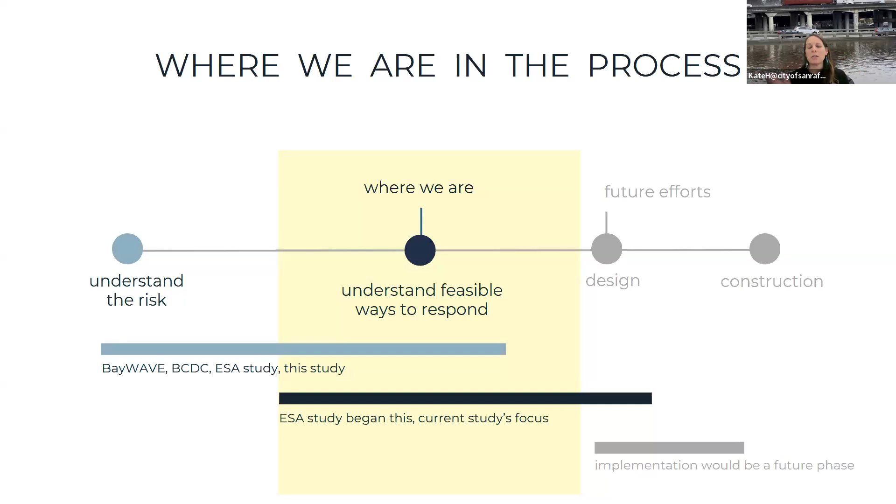Just to say quickly, design and construction will come in the years ahead, but they're not what we're talking about right now. In this study, while we may be talking about different adaptation measures, we're not intending right now to construct them. We're looking at several options and understanding them.

Because we have a very dense, very vibrant community, and a very close relationship with the water, in this case there isn't a right answer. We have hired experts, and they'll share their information and opinions, and that's really valuable. But as will become clear, having that information doesn't necessarily point us to a single right answer. In this case, we don't really have a single answer. It's going to take many different types of actions over many years and by many different people.

At this point, we have to consider the whole community. We have more than 10,000 people that live on land lower than the bay. Lots of jobs, infrastructure, healthcare, schools, really precious places to us, as well as the highway and wastewater treatment plants. So even if you don't live in this area directly, we're all affected by these impacts. We're using this information to help us make a more informed choice about a path forward that can help create a more thriving community in the generations to come.

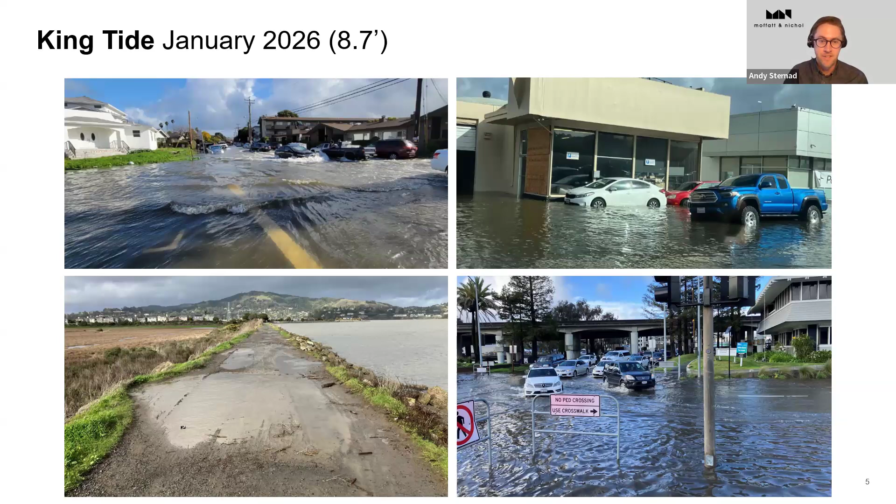These are tipping points. We're already seeing these overtopping impacts, but they're at the threshold of much larger impacts, overtopping and potentially compromising larger segments of the shoreline. So it's a very important moment. These risks are present today, and even higher tides could be seen in any given year. There's a statistical probability of much larger events in any given year, but there's definitely a trend.

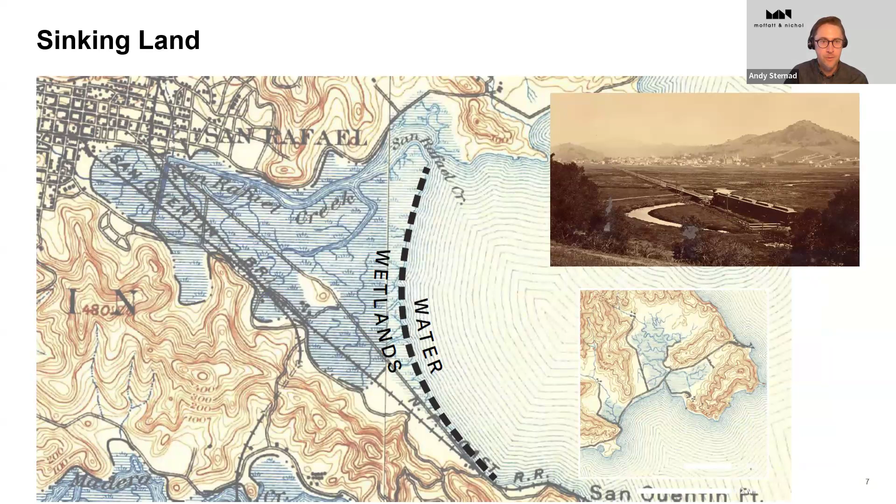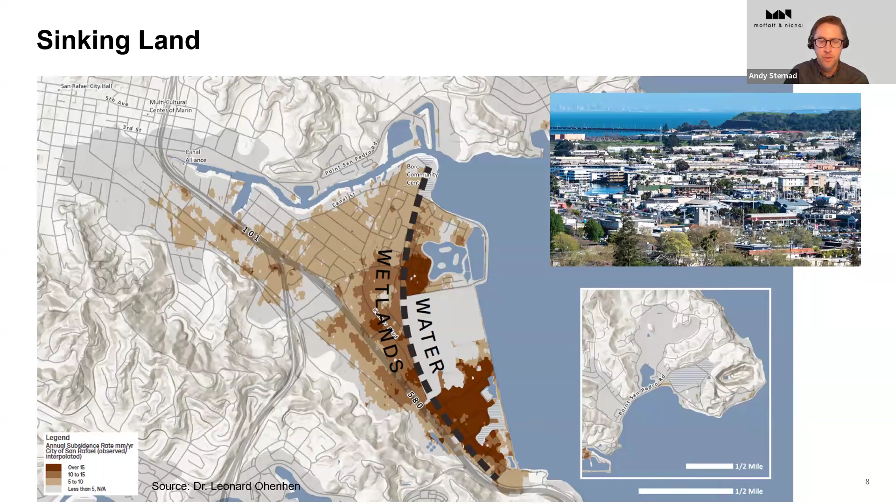The shoreline itself is also low and unstable. It's not continuous around that low basin, and in many cases it's very informal or unstable, literally sometimes piled debris. The king tides we've seen recently, in many cases along the canal shoreline and the bayfront, are within inches of overtopping some of those areas. And in some cases on the bayfront and canal have already overtopped in the recent king tides.

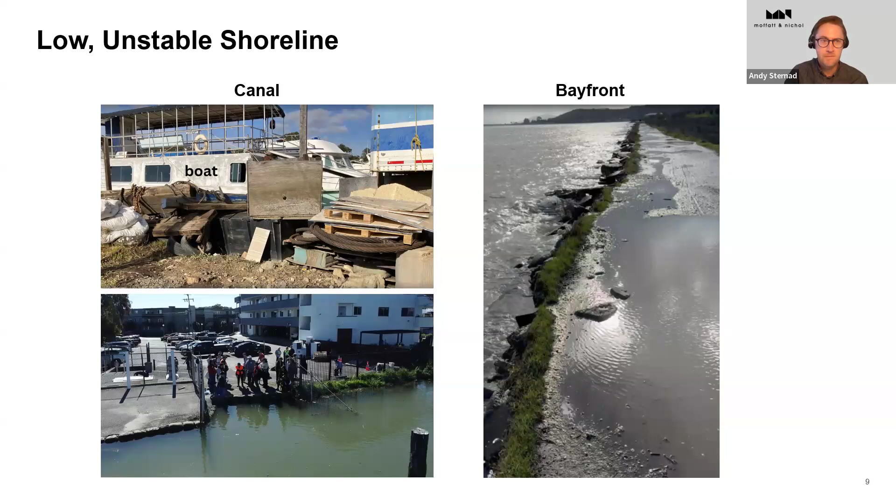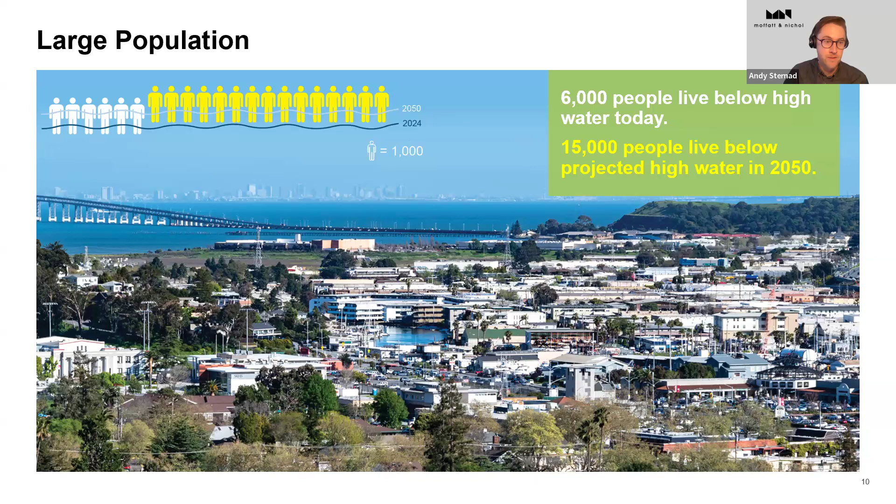The shoreline today has very limited space in general and many private owners. This is really not an advisable condition. Where coastal flood risk exists, we typically like to see public ownership and public accountability for that continuous edge, rather than relying on individual owners to maintain it. So there are many private properties on both sides of the canal that put everyone living behind them potentially at risk if their shoreline is not maintained and elevated over time. This is a fundamental challenge - space to adapt is hard to come by, especially within the canal shoreline area.

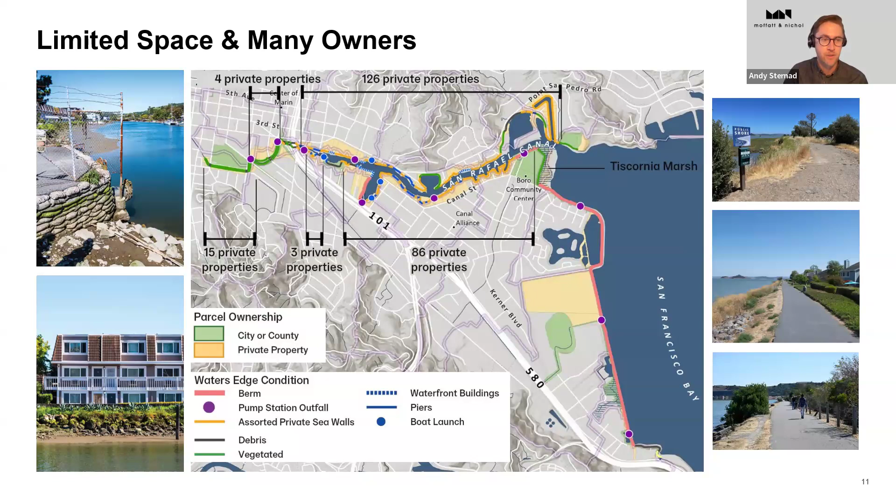All of these risks are covered in a briefing book and with additional resources online, including the feasibility report itself. You can find those at the city's website.

So briefly, a recap of the risks and vulnerabilities as well. What are we looking at today and in the future? There's a probability of high water any given year at water levels even higher than we've seen recently, and even higher than we've seen in the past few decades. All of that water that either falls by rainfall or overtops within the basin is dependent upon pumps.

So that risk of overtopping and flood based on overtopping grows each year as sea level rises. We've done some stormwater modeling, which I'll show you in a moment, on a no action scenario - what happens if sea level rises at a certain rate, or tides are reached at certain elevations with no action on the shoreline, independent of rainfall. The model indicates a real tipping point between 8 and 9 feet, similar to the king tides we've just seen, where impacts rise dramatically based on what we've seen historically. As we look ahead to 2050 and anticipate about a foot of sea level rise based on current projections, the likelihood of that tipping point event occurring on an annual basis becomes greater and greater.

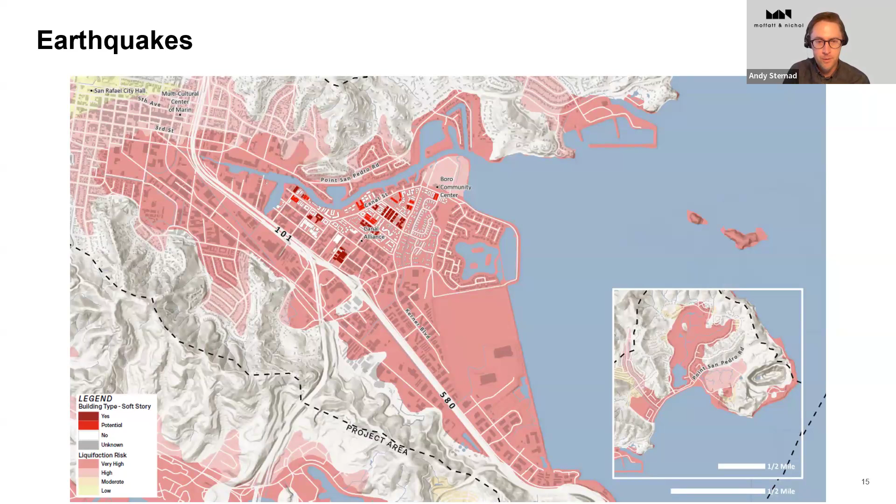Another risk faced today, not unique to San Rafael around the bay but especially so here, is earthquakes, seismic risk. There's a liquefaction risk on those filled bay soils. There's also a risk of earthquake destabilizing the informal flood protection and levees that exist today. So the buildings inside are vulnerable as well, in some cases with soft story risks. We can talk about that more in a moment when we get to alternatives.

Critical assets finally within the basin are at risk - things like fire stations, stormwater and wastewater pump stations, and community centers. One of the things we're seeing is that the nature of that risk has to do with access as much as risk to the structures themselves. So fire stations, the Boro Community Center for example, may stay dry during most tidal events we can expect to see. However, the access to and from those locations may be compromised - too deep to drive through, in some cases too deep for fire trucks to drive through. So if people need to get to those locations in emergencies, or if first responders need to get out, they may have trouble doing so.

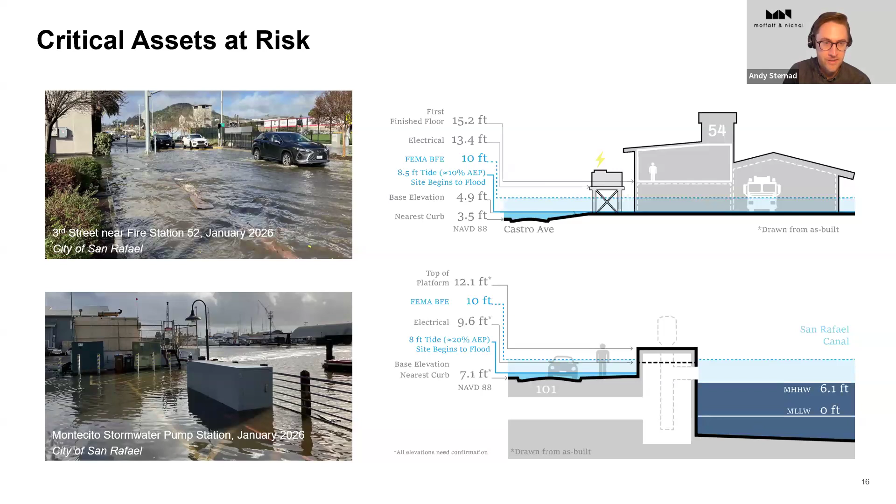The pump stations as well may essentially be recirculating the bay if water gets high enough, as we saw at the Montecito pump station just earlier this month. So what are the alternatives and what are their implications?

We modeled 3 alternatives. We also modeled a no action, or baseline, scenario. That's only for comparison, not to say we won't take action. We also modeled a series of initial actions—no regrets ideas, putting safety first—that can happen immediately and underpin all alternatives.

Finally, we looked at a suite of nature-based opportunities. These also go across all alternatives and have a variety of benefits, from wave attenuation to reduction in tidal amplification. So it's really a hybrid approach, integrating green and gray alternatives to develop these 3 scenarios. A lot of these concepts have been previously proposed, some from the Army Corps dating back decades, to more recent efforts.

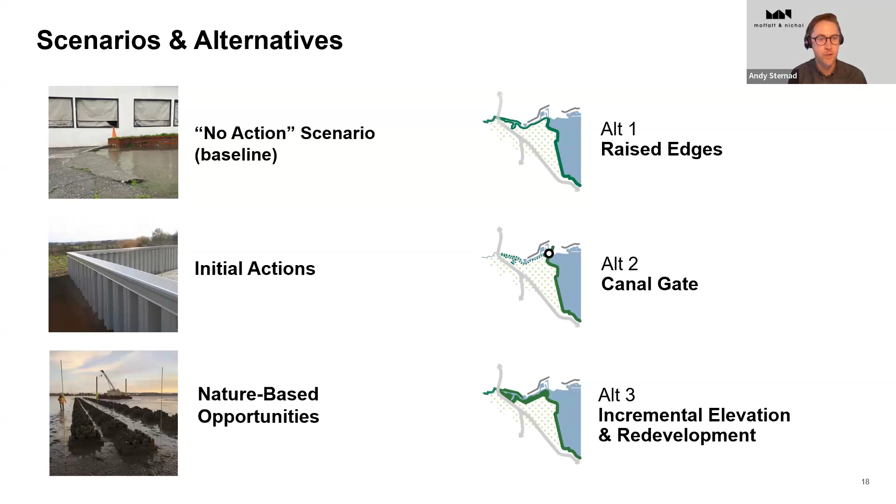What we're trying to do is not recommend one of these alternatives, but present them equally together for comparison. This is ultimately something that will have to be decided based on community conversation and by folks locally on the ground. Within these shorthand names of 3 alternatives, we're trying to capture a comprehensive, systemic approach 3 different ways and compare the implications across them.

Just a quick view of the no action alternative—what would it look like at different tidal thresholds with the shoreline today? These are scenarios with no rainfall, with all the pumps functional, and without yet accounting for future subsidence or projecting forward subsidence rates. So this is really a snapshot of today. It's also a model, so there's a coarseness to it—it's a hydrologic model, so there may be some inaccuracies, as in any model.

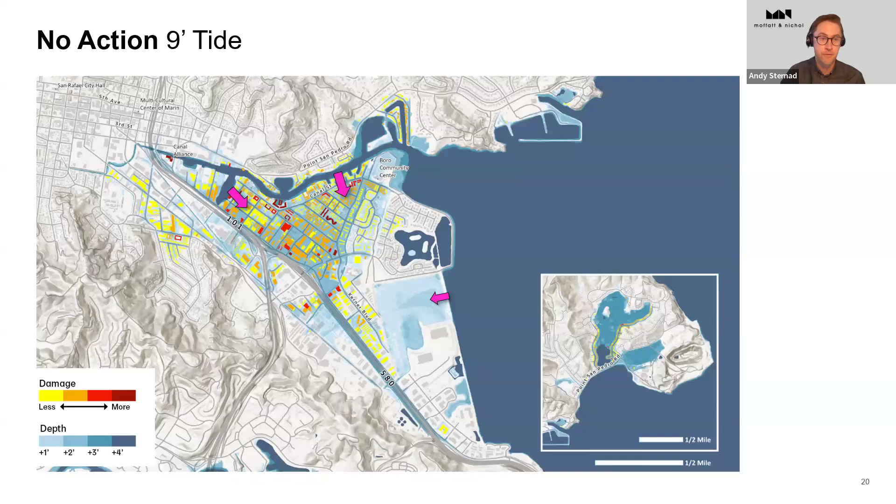But I think it's indicative of the trend and some of the recent events we've seen on the ground. An 8-foot tide observed today would begin to overtop some of the very lowest portions of the canal and threaten those informal areas of the shoreline, potentially starting to fill back along Francisco, as you can see in the model. At a 9-foot tide, as we approach that tipping point, you see the impacts grow and the potential overtopping locations expand throughout low areas of the canal, especially on the south shoreline, and right at about 9 feet in areas of the bayfront shoreline, the very lowest areas of bayfront.

As we look to a 10-foot tide, that overtopping expands. Those overtopped locations of the current shoreline expand, and we get to potentially 3 to 4 feet of flood depth in widespread areas within that basin. This is also a threshold point where we may start to see impacts on 101.

And again, these higher water levels have a statistical probability of being observed in any year. That means they could occur any year—this is not a future condition. They just become more likely over time.

The highest event we modeled was an 11-foot tide, where there's widespread overtopping throughout the district. These are the conditions with multiple days to drain those areas based on the pump station capacity today, once the water recedes. We also start to see impacts creeping up towards downtown and in the creeks entering the San Rafael Creek around the highway.

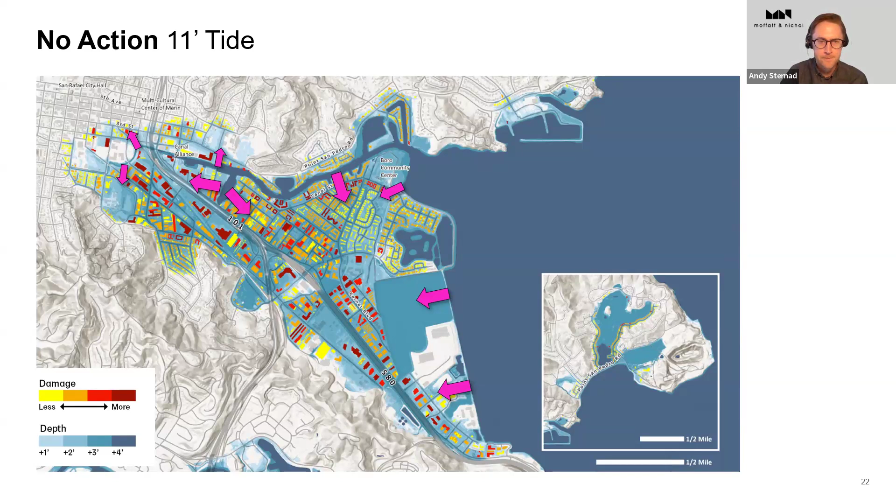So that's a no action snapshot. Initial actions that were framed are around some of those community priorities, including immediate safety, piloting of nature-based features that can influence future decision making, and thinking about no regrets—what are the features we could put in place today that will buy us time for bigger transformations and adaptations in any scenario?

Within the canal, those initial actions look like raising and stabilizing the lowest, most vulnerable areas, developing emergency response plans. We may also begin an evaluation of public acquisitions of the most vulnerable areas, or at least easements on privately held parcels. In the Bayfront, this includes potentially beginning design for the Bayfront levee, implementing the Tiscornia marsh restoration, and monitoring additional habitat measures.

Again, these are all proposed ideas—none of this is set in stone. And finally, basin and upland: within that low-lying basin and upland behind it, we need to maintain and upgrade the pump stations. Those are critical for drainage, for overtopping and stormwater drainage in this area.

And think about green infrastructure—things we can do for stormwater management within the basin and upland that reduce the pressure on those pump stations from rain. It's also important that green infrastructure can help mitigate some of the subsidence and groundwater issues we see.

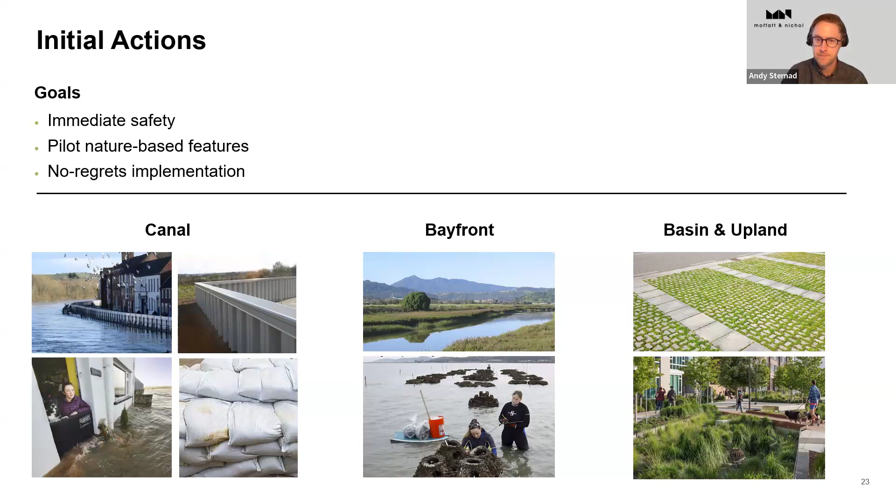Nature-based opportunities—just a snapshot of some things that may exist in habitat types around San Rafael, the San Rafael OLU. We identified a range of nature-based opportunities on the canal shoreline, on the bayfront, and upland that may be part of any of the alternatives.

Things like protection of the existing baylands, enhancing rocky intertidal habitat, thinking about nearshore reefs and the value of oyster reefs and wave mitigation. Coarse beaches—there are some that already exist along the San Rafael levee. How could those potentially be sustained and expanded?

And more: managed marshes, and all the way up to things like implementing habitat on vertical surfaces and bulkheads. So there really is green and nature-based opportunity everywhere throughout all the alternatives. It's a matter of selecting these features and integrating them into design moving forward.

So the first alternative, raised edges. This is a concept essentially to protect in-place structures and infrastructure that are there, and strategically insert higher seawalls, offshore and onshore seawalls, and raised levees where we can.

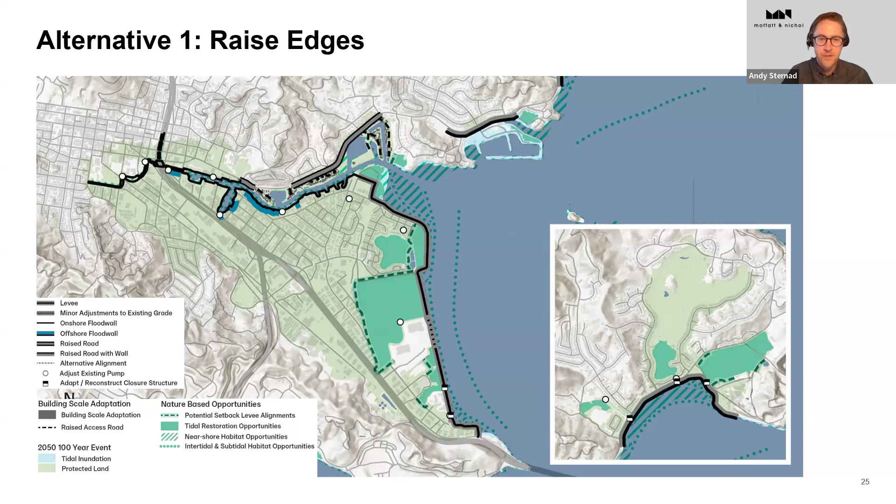And then elsewhere on the north bank of the canal and elsewhere around the bay are individual structure raising and access adaptations, along with raised roads to maintain connectivity. So the priority here is really to develop a contiguous raised edge at a standardized elevation around that low basin area and provide adaptation for safe access to structures elsewhere.

So what might that look like? Just a quick view for the bayfront. Strategies may look similar to what's there around the Spinnaker Lagoons, for example, and around Tiscornia Marsh. Providing opportunities for restored and protected marsh habitats, providing opportunities for a raised bay trail. In some cases, this is a few inches, all the way up to a couple of feet, to get to a standard threshold of protection, a 100-year threshold of protection, 2050.

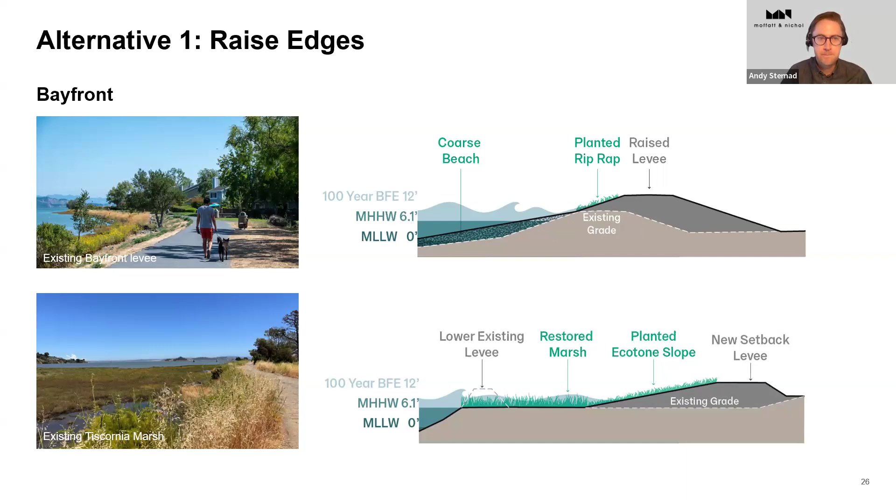Along the canal shoreline, we can look at examples around San Francisco Bay. Down in Foster City, it may be a flood wall, a sheet pile flood wall that's capped, could exist onshore. Offshore, we may be looking at something like a cantilevered seawall. You can see an example of this in the breakwater at Treasure Island, of a freestanding structure within the water.

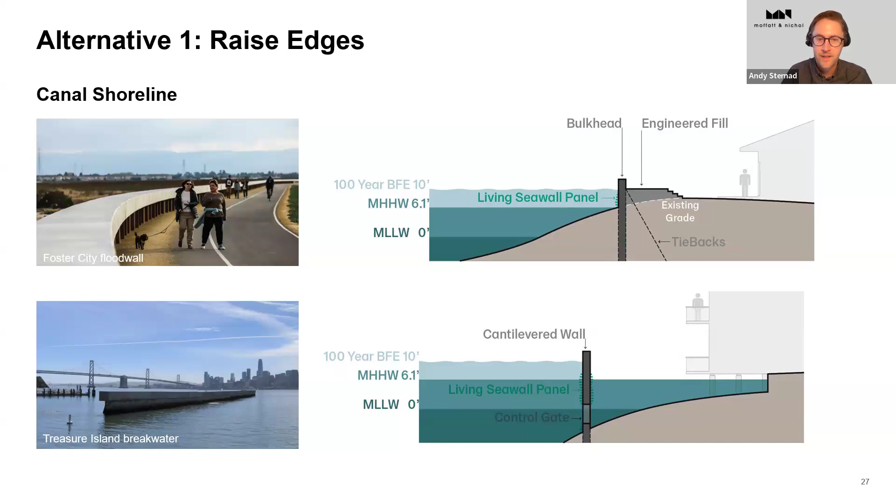In the canal case, there would be water on both sides, except in the highest water levels when the land side would be protected. So those structures are really working in and around, where possible, what's there today. We're not fundamentally proposing to change the pattern of ownership around the canal or around San Rafael.

Alternative 2 is a canal gate. This would be a navigable structure, gate structure at the mouth of the canal with very similar adaptations elsewhere along the bayfront, raised roads, raised levees.

Important to note in the canal gate option, this isn't a one and done. There would potentially still need to be adaptations behind the gate on the shoreline to limit the number of times that gate would operate. And we'll talk about that again in a moment.

Also important to note in this alternative would be a forward pump station associated with that gate at the mouth of the canal. This pump station would be quite large, approximately 3,000 CFS. That's around at least an order of magnitude larger than the largest pump station in San Rafael today. And so we'd be managing all of the water that comes down San Rafael Creek when it's raining. All of the basin area and all of the upland area draining through the creek would have to be managed in the event that gate were closed.

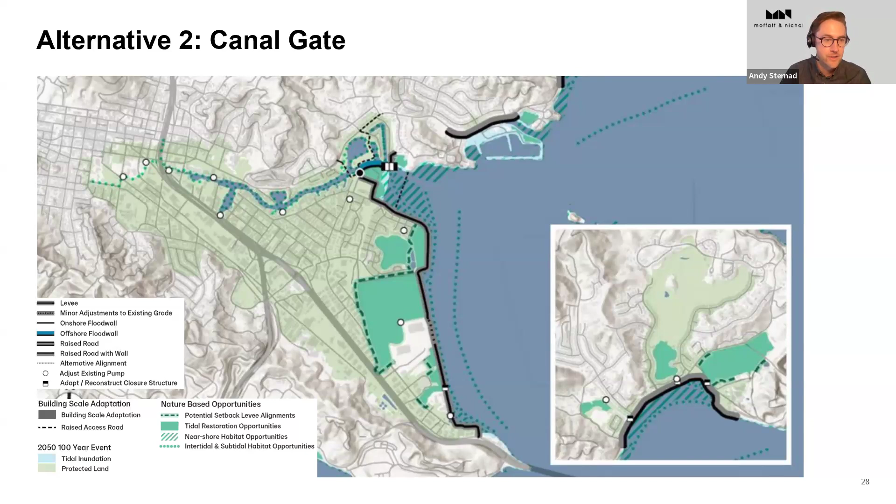Examples of what gates may look like. From a sector gate, here's an example from New Orleans on the left. This is an operable navigable gate. Smaller gates like tide gates can exist in other places. One exists, for example, in Lake Merritt in Oakland. Those are not navigable and manage water in different ways. We'll talk about some of the implications of this gate for water quality and other things in the interior behind it in just a moment.

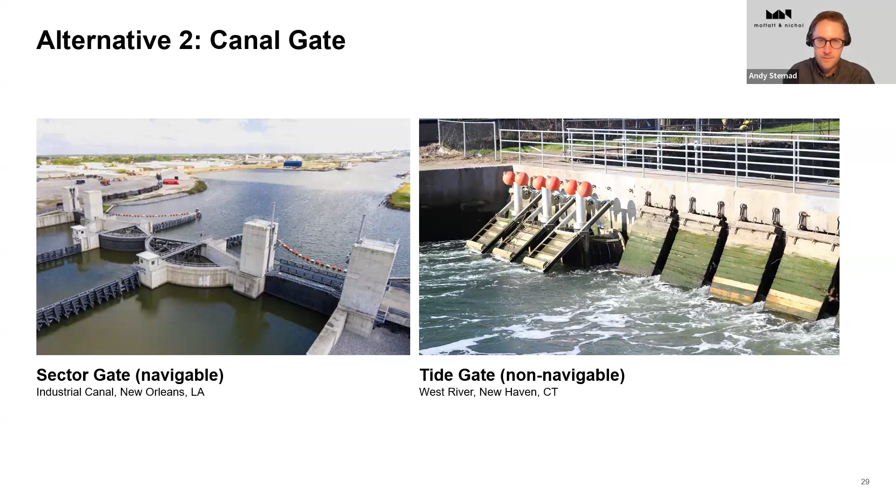And finally, alternative 3, this is incremental elevation and redevelopment. The bayfront condition would look similar to the previous 2 alternatives, a raised strengthened levee. Within the canal shoreline itself, this is a larger redevelopment strategy between the first public right-of-way or street and the canal edge along the south shore and wrapping around towards San Rafael High School on the north. And then the similar raised road and structure strategy elsewhere on the north shoreline.

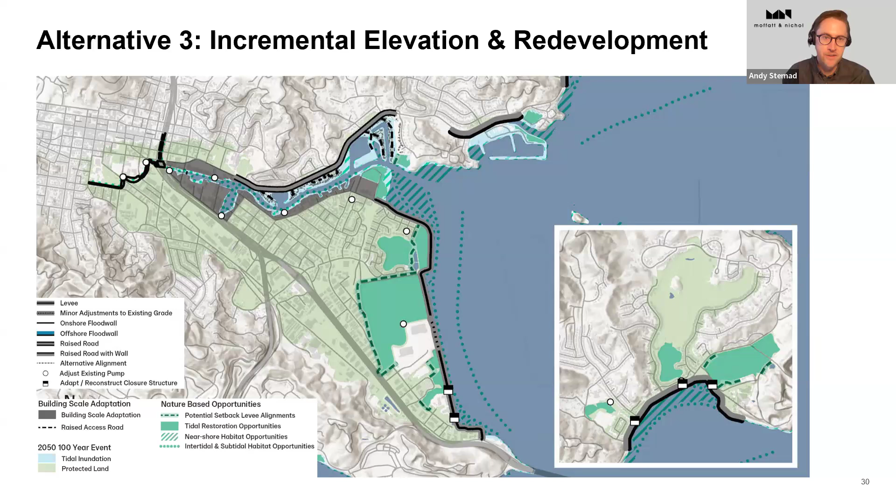This is potentially the longest term. It may take the longest and may be the most expensive. On the other hand, it may provide benefits that others don't long term. This is the only proposed alternative that really makes space, new space, for the types of flood protection infrastructure that are seen elsewhere around San Rafael and the bay, within the canal.

So the feasibility analysis of these alternatives was multifaceted. We looked at a range of criteria from flood protection to timelines to space requirements, permitting, all the way down to ownership, housing, ecological implications, economic implications. They all have advantages and disadvantages. We'll go through these briefly in summary.

In the near term, in alternative 2, the gate may be expected to close around monthly by 2050. And so those interior shoreline adaptations for those lowest areas of the canal shoreline may still need to occur. That's assuming there is still some level of modification, those initial actions that modify the lowest and weakest points. So it's not only a strategy that happens at the mouth.

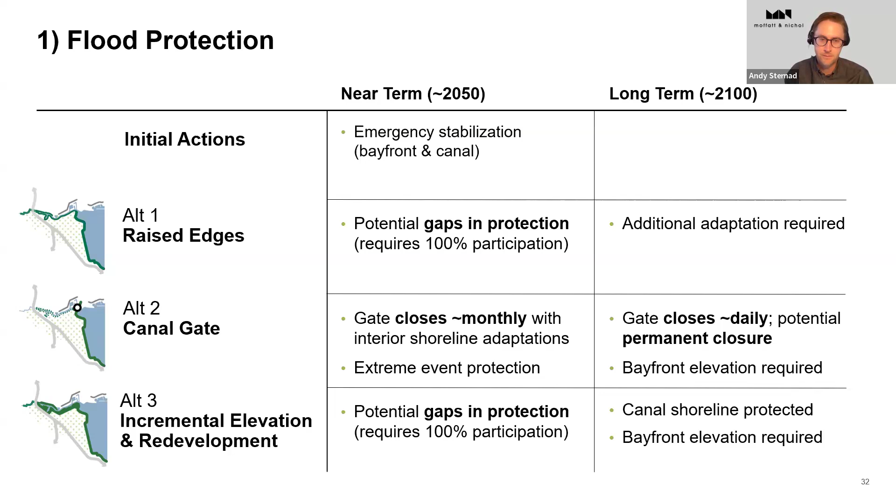Long-term, an additional bayfront levee lift is required for alternatives 2 and 3. And then finally, alternative 3 in the 2100 timeframe, we reach those levels when the full alternative is implemented. So further adaptation may not be necessary within the shoreline of the canal in this alternative. It can last potentially a generation or more.

Thinking about planning horizons, all of the alternatives take years, sometimes decades. This requires securing funding, in some cases securing land, design and engineering, permitting, and then construction itself. So these are all long-term. What we're really trying to do with the initial actions is buy time. So stabilize the lowest areas of the canal and bayfront shorelines to give us a little more time to implement larger adaptations. Alternative 1 may take somewhere between 10 and 30 years to build.

We evaluated a fast and a slow scenario for each alternative and then an average. So what's represented visually is the average to the right. You see the funding, design, and permitting, then you see the effective protection in dark green, and then future adaptations moving past that. Alternative 1, if it's in the average and slower timeframes, there's a potential gap in protection if the whole alternative is not put in place in time. It's dependent on a contiguous whole.

For alternative 2, the canal gate may be slightly faster to build. There's less linear area affected, and the canal gate itself may function for longer. To make such an investment, it's wise to use a higher elevation or higher threshold for the gate itself. So the gate may function for 2070, 2100 levels. It can be built to function that way at first, but the bayfront may need to be further elevated in lifts over time.

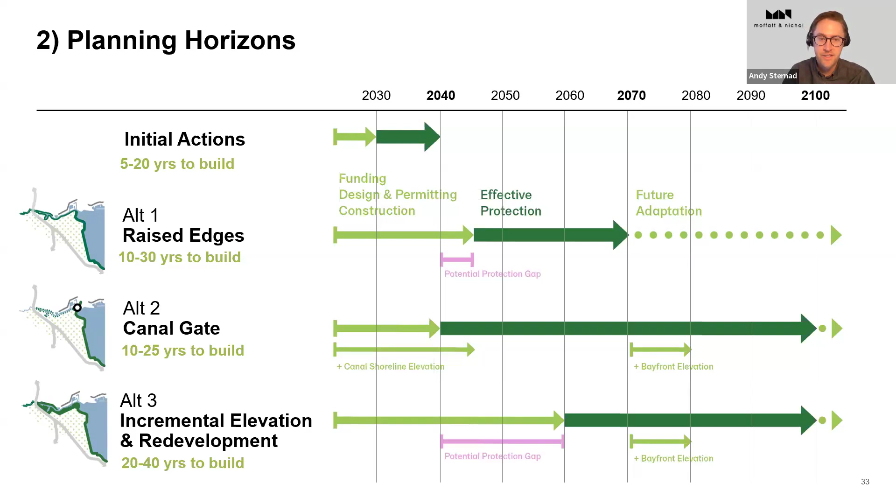Spatial requirement comparison, looking at length of the levee and seawall condition, length of raised roads, and then overall building impacts. And those building impacts range from floodproofing in place, potentially wet and dry floodproofing where applicable, to structures in place, to reconstruction. You see the longest option in terms of length of levee and seawall is the raised edge, alternative 1. The shortest option is the canal gate, which makes sense. We're not necessarily dealing with all of the shoreline behind it, although that may need to be done to some level.

The raised road, the shortest length of raised road, as well as the canal gate, but you'll see an asterisk all the way through. These do not include potential adaptations that may need to take place for the canal shoreline. And then building impacts, the gate has the fewest, touches the fewest existing structures. However, again, that does not include the canal shoreline adaptations behind.

So while alternative 3 touches the most structures and area, around 82 acres, just over 80 acres within the canal shoreline itself, as you compare it to the other 2, you may need to revise or combine those alternatives in a way, as far as building impacts, because there would be impacts for the canal shoreline within the gate alternative.

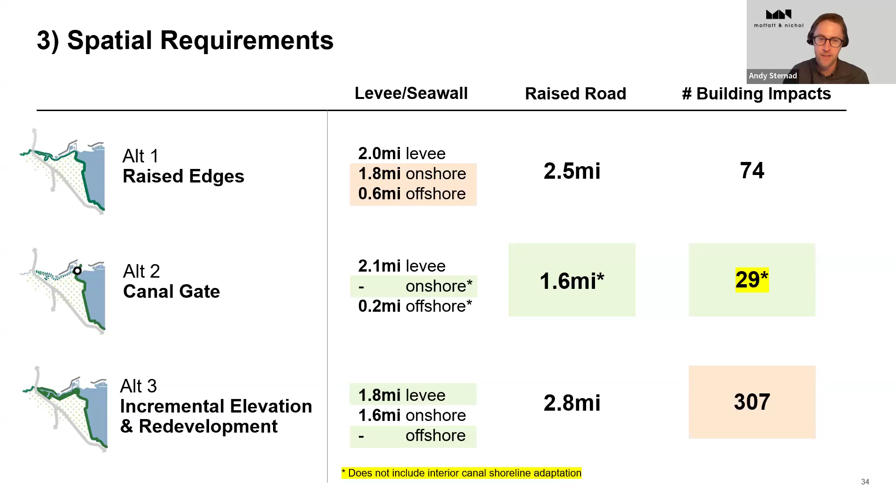As far as permitting impacts, alternatives 1 and 2 may see some mitigation needed for in-water construction impacts, and especially alternative 2 for additional habitat impacts near the canal mouth, for the structure itself and for that forward pump station. The alignment intention is to avoid the restored Tiscornia Marsh

but there may be adjacent impacts to sensitive habitats for those large structures. Alternative 3 proposes no limited or no in-water construction, and so no in-water impacts. And permitting would rely more heavily on the city and BCDC for more intensive adaptations on land. All of the alternatives require an environmental impact report moving forward and potential engagement with a multitude of agencies.

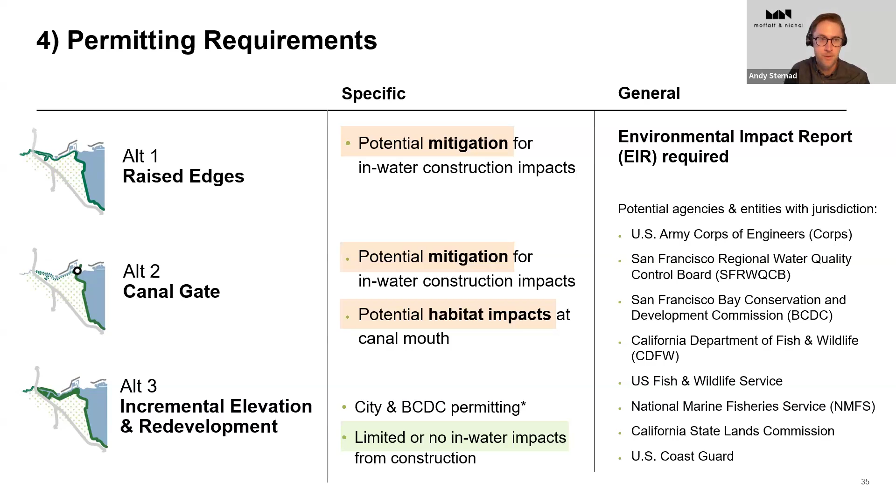Land ownership would be primarily the same as we see today for alternatives 1 and 2. We would maintain most of the shoreline ownership with the exception of easements and public acquisitions of certain parcels or parts of parcels where necessary. And sometimes that's for maintenance access, sometimes depending on funding source.

For example, if the Army Corps or certain other federal sources are used, the land must be public for these types of structures and interventions.

Alternative 3 is really the only alternative that increases public access and connections, increases the possibility for public ownership of those protected shorelines, protecting the basin condition, and it provides opportunities for public-private partnerships.

That area for redevelopment between the street and the shoreline, however it may be acquired in order to initiate the redevelopment, there may be opportunity to, through public-private partnerships, capture some return on investment and to really reimagine what the canal shoreline is today.

As far as co-benefits, alternatives 1 and 2 are really focused on maintaining the structures and status quo. So there's limited co-benefits. These are trying to find space where we can, but not really changing the paradigm or changing the way the shoreline looks or is managed today, especially within the canal.

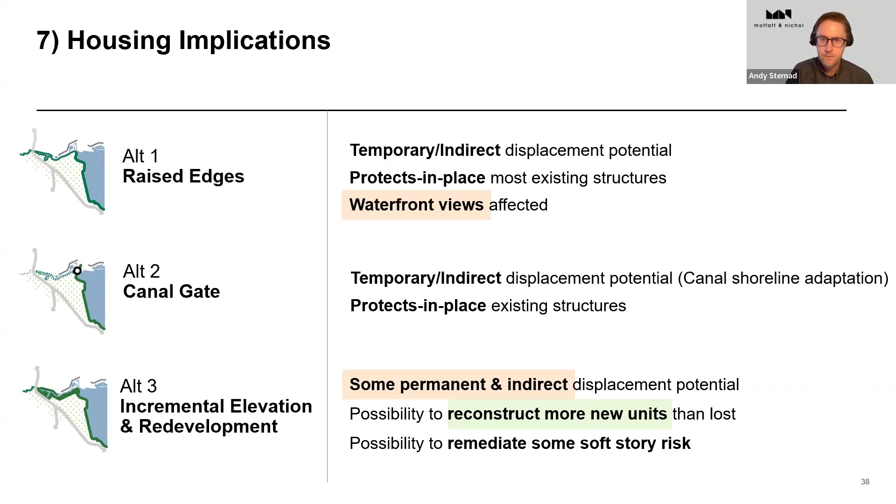Ecological implications, alternative 1: really the opportunity here is for vertical seawall habitat, but there's not much space for anything else within the canal.

Alternative 2 within the canal has possible construction and operational impacts. These include things like turbidity impacts, noise and vibration, habitat impacts, air and water quality from the operation of the gate and the forward pump station.

Alternative 3 within the canal really provides the opportunity to make space. So if we can allocate and hold space for more habitat and for water quality improvements, that's where we can see potentially the most benefit. It's the most transformative in terms of space.

On the bayfront, there's, as I already mentioned, a variety of nature-based opportunities, all up and down, at key locations up and down the shoreline, the bayfront shoreline.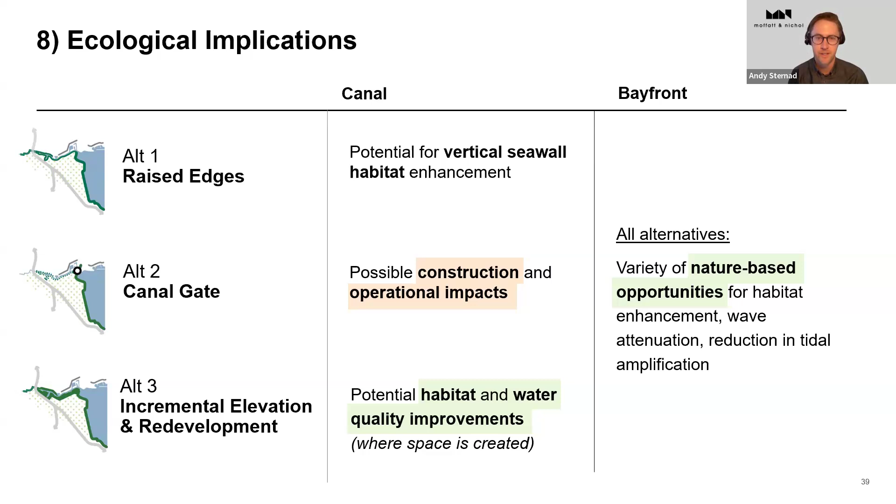Habitat and ecological improvements are, for the most part, not protecting from overtopping, from still water overtopping of that bayfront edge. But in combination with other types of infrastructure, they can provide benefits like wave attenuation, reduction of tidal amplification, at the same time as habitat enhancement.

And finally, what does it cost? What is the economic feasibility?

Alternative 3 is the most expensive by far, but it's also the most transformative. The number here, 1.8 billion, rough cost, does not include the redevelopment value, the cost to actually rebuild housing units, or the potential real estate return on investment. Alternative 3 is the only alternative that provides potentially a return on investment for new development directly associated with flood protection.

As far as annual operations and maintenance, the most expensive is the gate. The least expensive is raised edges, basically static structures, with the exception of a few places where water is moving through that offshore seawall. That's calculated as just an annual percentage of construction cost, every year. It's important to note the city would also need to set up, in some cases, new organizational structures to manage this infrastructure.

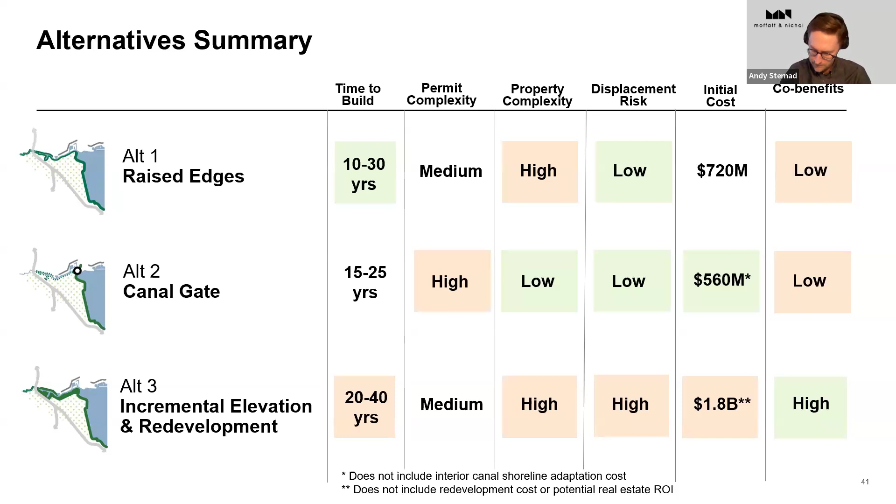So with that, I will hand this back to Kate, talk about next steps and questions.